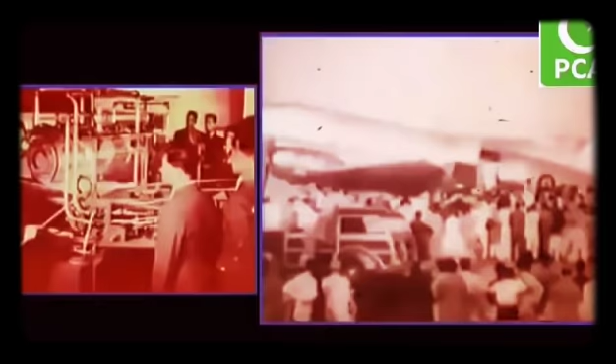Aircraft Manufacturing Factory was established in 1975 to undertake manufacturing of a primary flying trainer aircraft under license from Saab Scania of Sweden. The aircraft was named Mashak, meaning proficient, and was produced from kits provided by Saab. After successfully producing 92 Mashak aircraft, AMF acquired the status of Original Equipment Manufacturer, or OEM, in 1981.

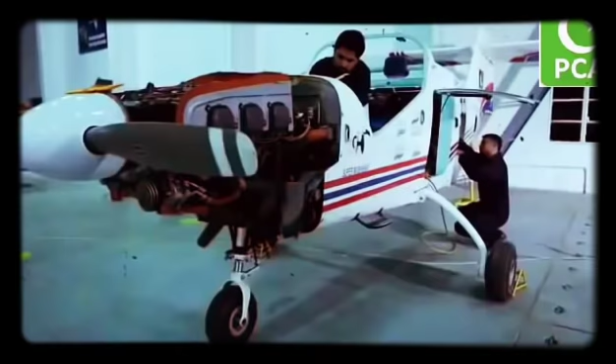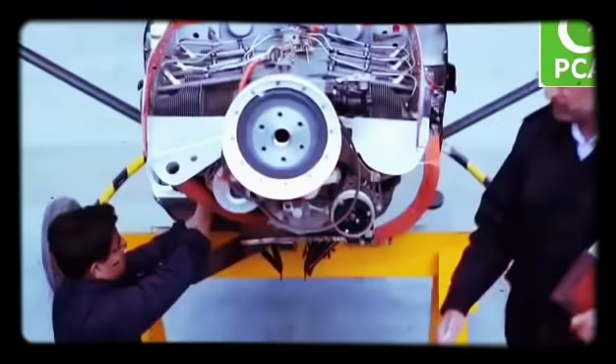Within a short span of just 30 years, AMF has produced more than 300 Mashak aircraft, which are successfully flying not only in Pakistan but also in foreign countries such as Saudi Arabia, Oman, and South Africa. The Mashak not only meets the requisites of international aviation standards but also conforms to Pakistan and South African civil aviation standards, and that is why it is the frontline aviation product of Pakistan.

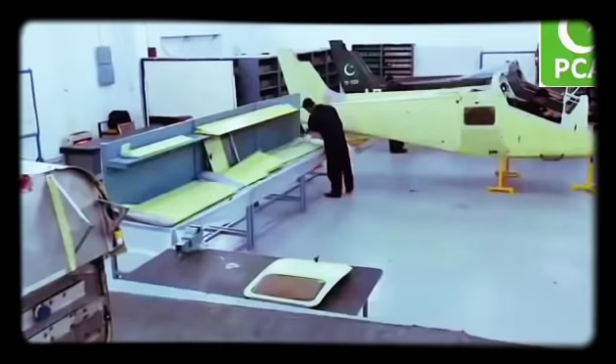During the course of manufacturing, AMF, in order to improve the design and performance, produced an upgraded version of the aircraft in shape of Super Mashak.

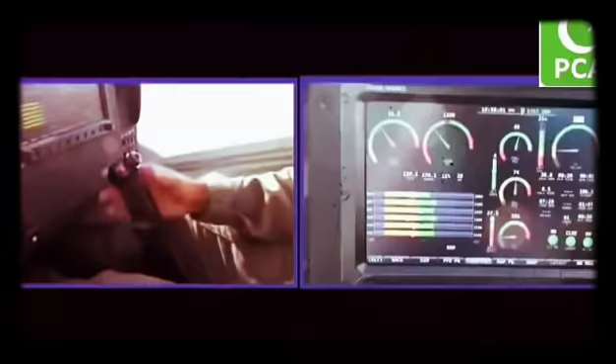Equipped with Lycoming 260 horsepower engine, advanced avionics package, Garmin and Dynon glass cockpit, and side-by-side seating for instructor and student pilot, Super Mashak forms an ideal platform for a variety of roles. Short takeoff and landing distance, higher G-load bracket, excellent stall and spin recovery, and above all, excellent after-sales spare and structural spare support are some of the key features rendering Super Mashak aircraft far superior to its contemporary primary flying trainer aircraft of the same class.

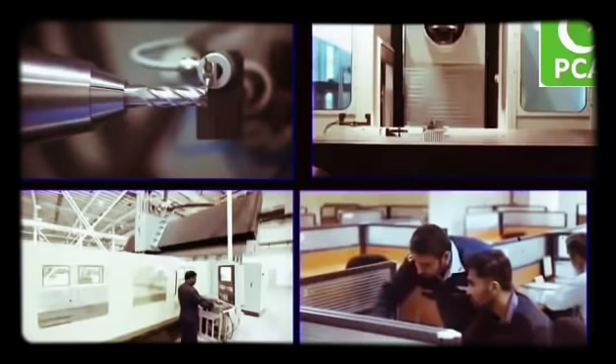The aviation industry in Pakistan has experienced tremendous growth in the last 30 years. Over the years, AMF's stature as an aircraft manufacturer grew manifold, with successive capability achievements to manufacture the jet aircraft trainer K-8 in the late 80s, the unmanned aerial vehicle Falco in 2008, and the modern jet fighter aircraft named JF-17 Thunder.

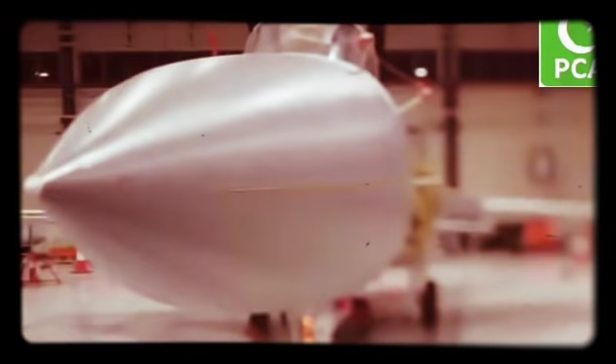Today, Aircraft Manufacturing Factory has the capability of manufacturing structural parts and aerostructure assemblies such as the horizontal stabilizer, elevator, vertical stabilizer, rudder, and front fuselage of K-8 aircraft.

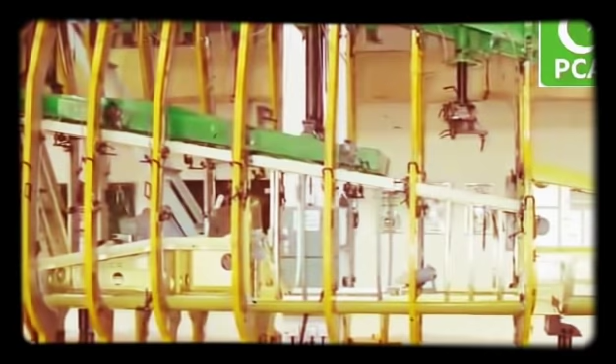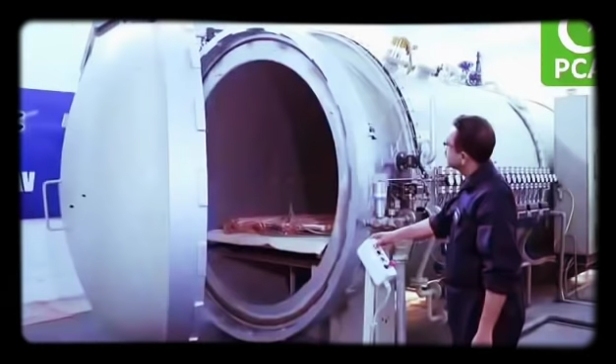Keeping abreast of evolving trends in aviation, AMF decided to venture into manufacturing unmanned aerial vehicles through the latest carbon composite material processes. Pakistan Air Force, after a comprehensive operational and technical evaluation process, decided on establishment of a Falco UAV manufacturing facility at AMF.

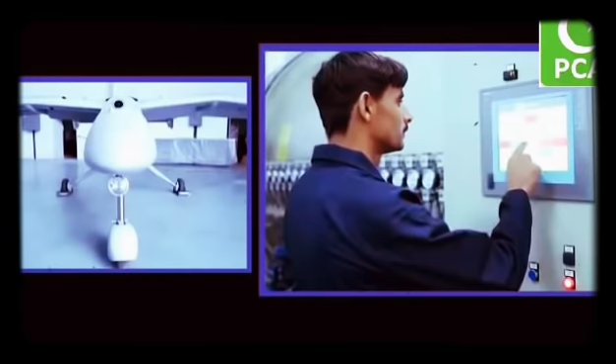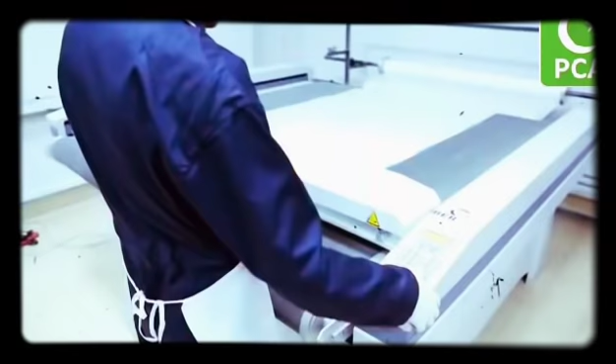During the first phase, 8 Falco UAVs were received in the form of semi-assembled kits. The final assembly and system integration of these UAVs was successfully accomplished at AMF PSC Kamra under the supervision of OEM in the 2007-8 timeframe. During the same time period, state-of-the-art equipment was also purchased to start co-production activities.

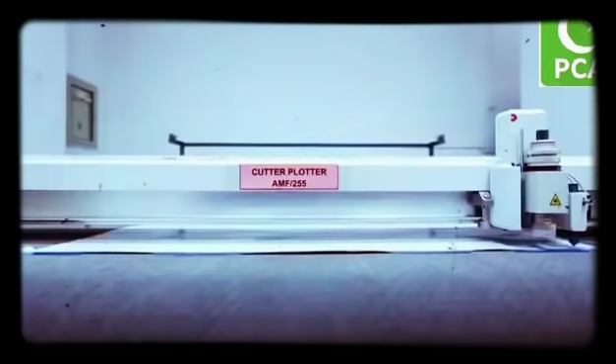After commissioning of the equipment and training on parts manufacturing, the newly established manufacturing facility was qualified by OEM to manufacture Falco UAVs on European quality standards.

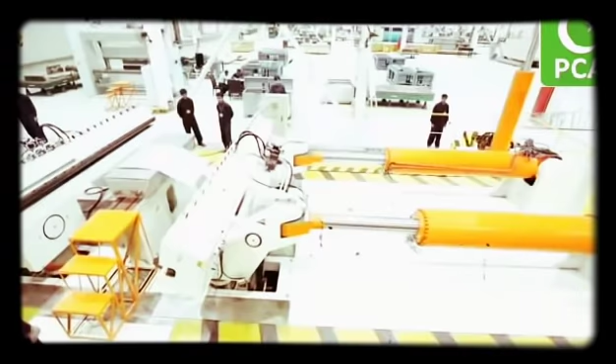An aviation industry is considered at its pinnacle when it has the capability of manufacturing a modern fighter aircraft. Today, AMF has complete infrastructure, core capabilities, and state-of-the-art technologies for manufacturing of JF-17 aircraft.

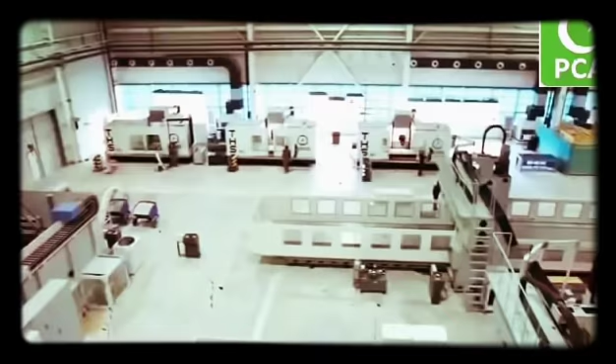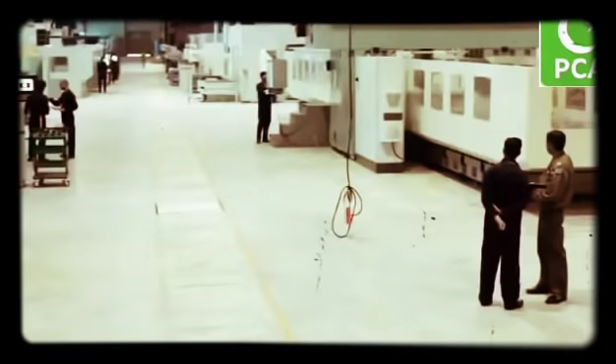The Machining Center for production of aircraft parts is equipped with state-of-the-art conventional and CNC machines. Parts with relatively lesser accuracies are manufactured on conventional machines, whereas complex parts involving higher accuracies and profiles described by higher order polynomials are manufactured utilizing CNC machines, integrated with computer-aided design and computer-aided manufacturing systems.

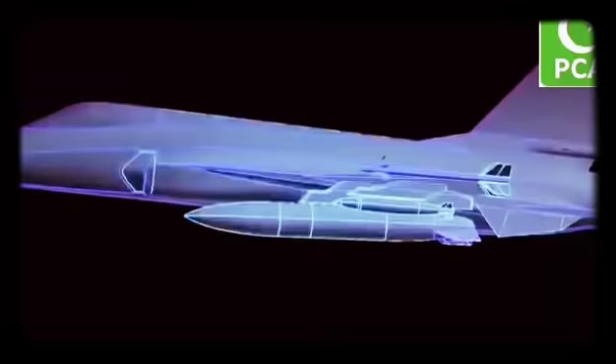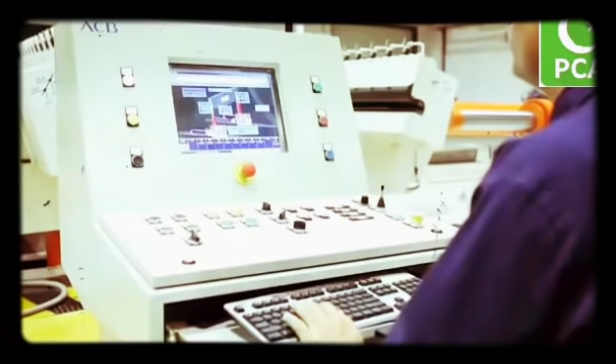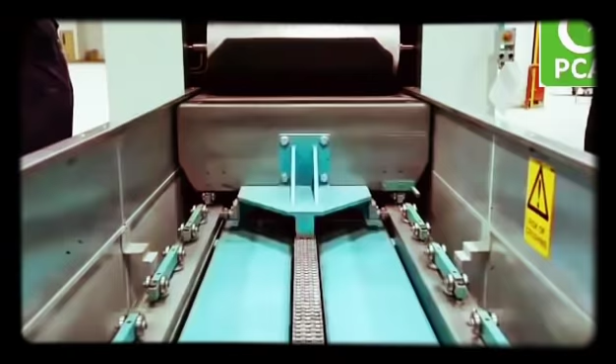The Sheet Metal Workshop for JF-17 parts houses an array of conventional and CNC machining facilities. Machines such as guillotine and nibbling shear, conventional and CNC stack routers, etc. are utilized for processes like shearing, routing, and sawing, whereas CNC shot peen forming, hydraulic quintus, fluid cell press, CNC stretch forming, and CNC punching are used for manufacturing parts involving sheet forming processes.

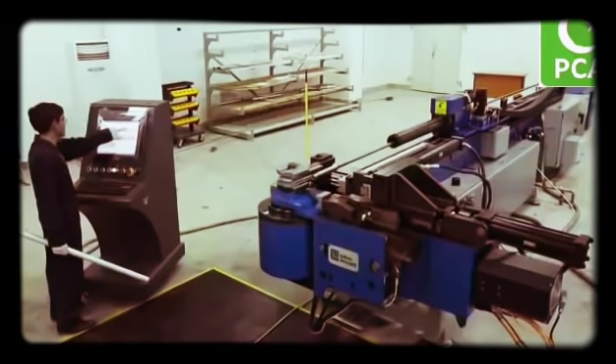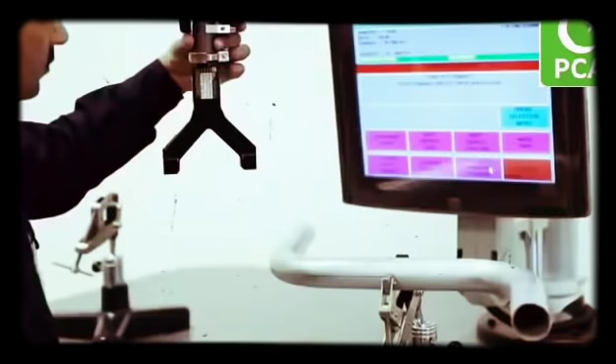Pipe manufacturing, emerging recently as a separate technology of manufacturing, caters for the requirements of aircraft hydraulic, pneumatic, and oxygen systems. It involves pipe bending, end fitting, testing, marking, and covering. The most typical equipment being used in pipe manufacturing is the CNC pipe bending machine.

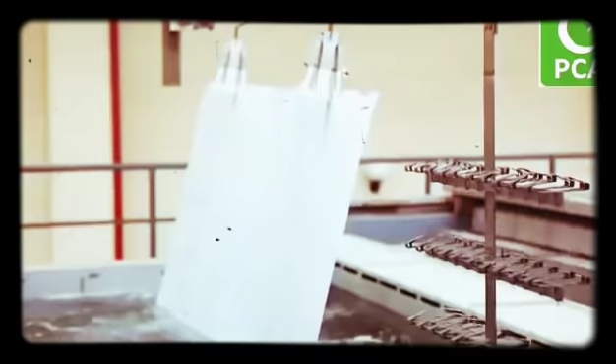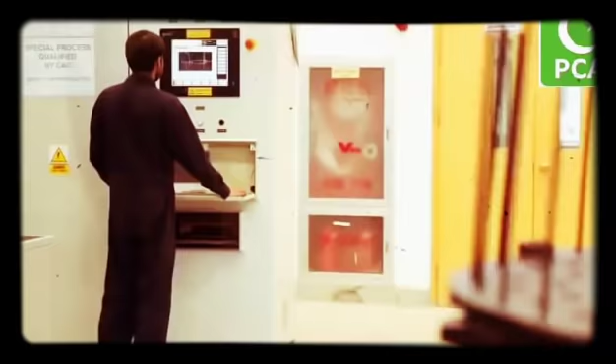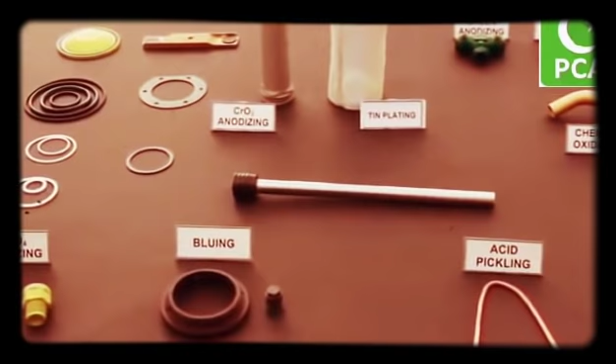Special processes form an integral element of any modern manufacturing facility, as almost all sheet metal and machine parts undergo heat treatment, surface treatment, welding, and various other types of special processes during manufacturing. Vacuum oil quenching furnaces, air circulating and conventional furnaces, etc. are employed for heat treatment, whereas chemical treatment facilities include anodizing, chromating, bluing, phosphating, pickling, passivation, electroplating, primer painting, and chemical milling.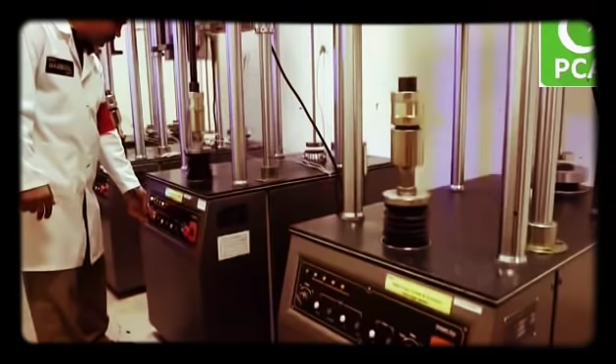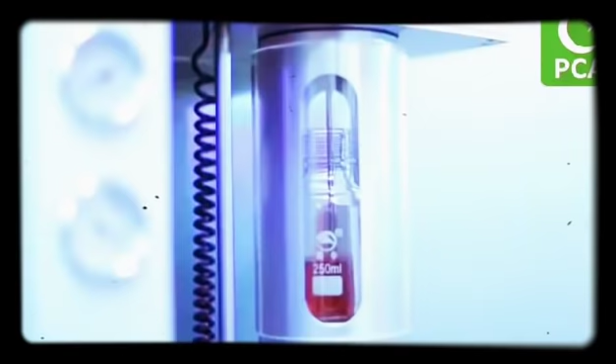Every manufactured part has to undergo a series of testing and inspection procedures from raw material till final stage at the Material Testing Center. The Material Testing Center has the capability to conduct all kinds of physical, chemical, and non-destructive testing of materials, including testing capabilities of all heat and surface treatment equipment for periodic qualification.

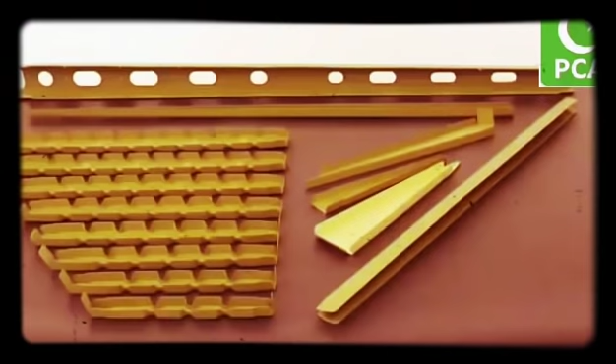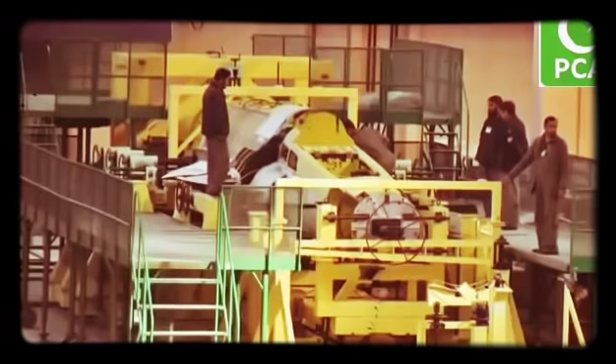The first phase of aircraft assembling starts at the aerostructural build-up facility. Hundreds of sheet metal and machine parts, pipes, and components are skillfully put together with the help of thousands of rivets to build aircraft sub-assemblies such as fuselage, wings, horizontal and vertical stabilizers, and ailerons.

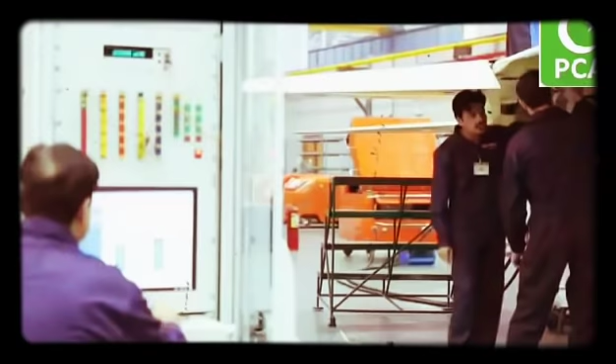The aircraft starts to take shape at the final assembly setup, where sub-assemblies, all system parts, engine, piping, and cabling are installed and integrated before sending the assembled aircraft to the flight test station for stringent power-on and functional checks of each and every system of the aircraft.

This is followed by a series of aircraft ground runs and quality shakedowns before finally handing it over to the test pilot for yet another series of functional check flights to ascertain the airworthiness.

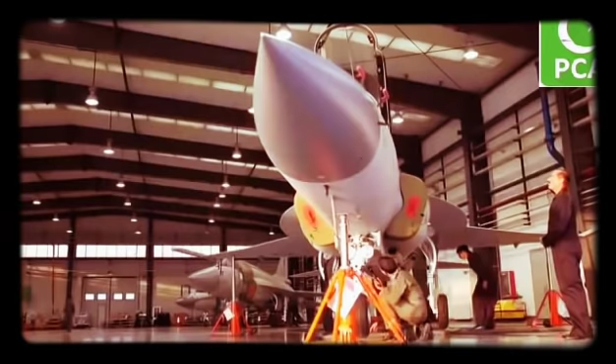The manufacturing of JF-17 Thunder fighter at Aircraft Manufacturing Factory has brought Pakistan among a select group of countries of the aviation world. Attainment of this capability in less than a quarter of a century itself speaks of the highest standards of dedication that AMF engineers and technicians showed since the word go.

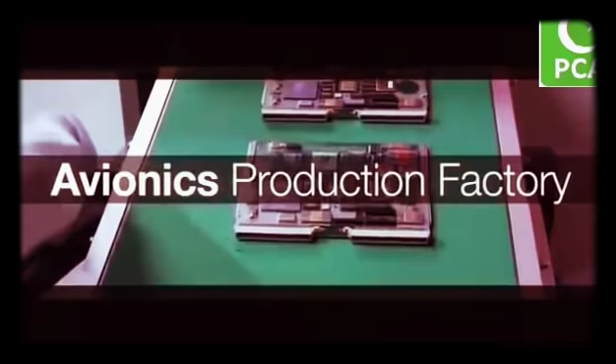Avionics setup of Pakistan Aeronautical Complex, known as Avionics Production Factory, was initially established as the Radar Maintenance Center in 1983 for overhaul and rebuild of ground-based radar systems. In 1989, it was transformed into a full-fledged avionics factory with ability to handle avionics as well.

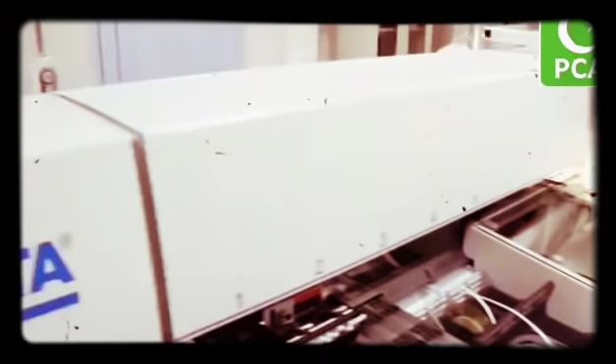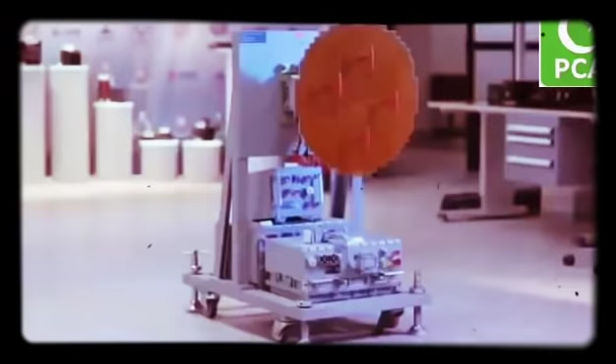Today, this factory, with its state-of-the-art facilities, can undertake production of different types of avionics as well as commercial electronics equipment while ensuring high-quality standards as per the requirement of Aerospace Standard 9100C. The factory has produced numerous avionics systems like Grifo-7 and KLJ-7 airborne radars, radar warning receivers, identification of friend or foe systems.

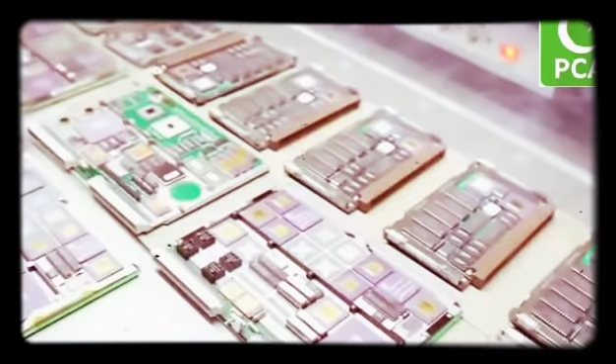Digital, audio, video and crash recorders, various mission computers and navigation systems. Most of these systems have been co-produced in collaboration with Chinese and Western manufacturers. The factory has also produced various commercial products such as PAC pad called Takhti 7, PAC notebook and e-book reader.

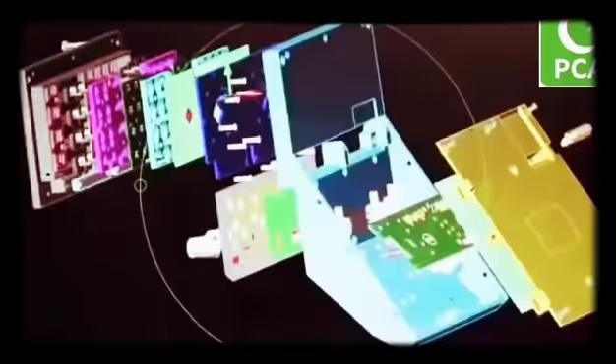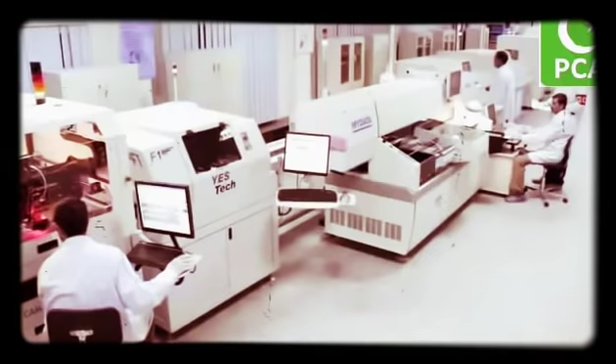The avionics production facility at APF can be divided into 6 major segments: design and development, avionics integration, production line, testing line, specific system department, and environmental stress screening facilities.

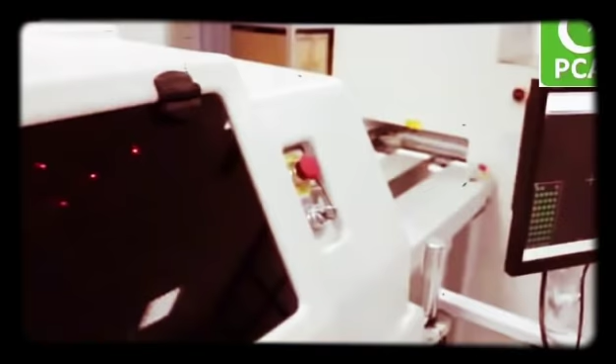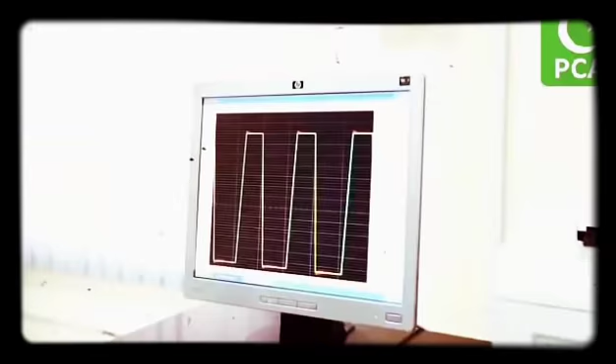APF can undertake design and development of avionics systems based on user requirements and provide complete solutions from concept to life cycle maintenance of the products. The prototype avionics systems are designed using computer-aided design and simulation tools. The prototype systems also undergo electromagnetic interference and electromagnetic compatibility and environmental qualification.

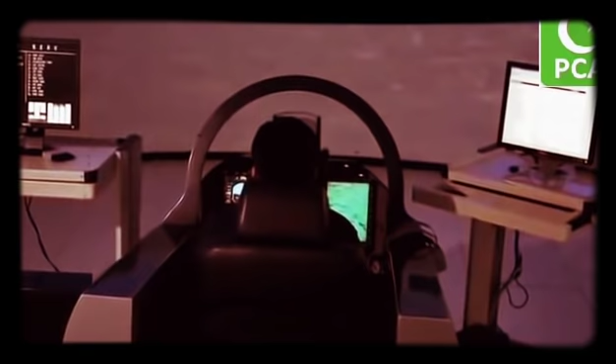Systems developed at APF have qualified and are flying on fighter aircraft. The developed system prototypes are functionally tested and integrated in the Dynamic Simulation and Integration Laboratory known as DSI. The facility can also undertake integration of off-the-shelf systems with an avionics suite.

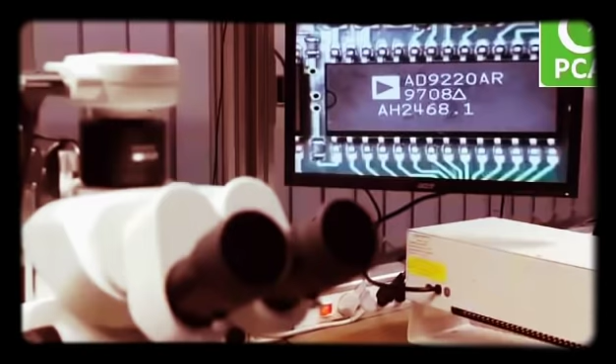Being a certified avionics integrator with years of experience, APF has developed core integration technology for meeting requirements of new fighter aircraft and upgrades and modifications as well as retrofits in older aircraft.

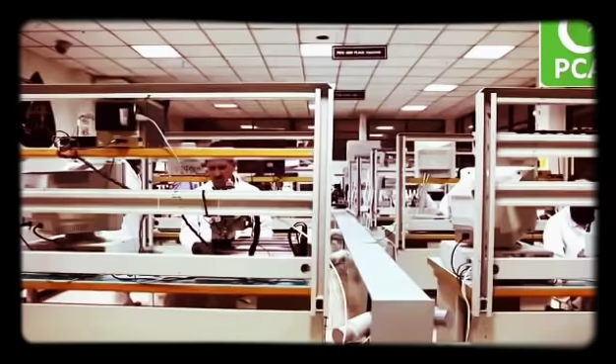The systems are validated through hardware in the loop ground testing in simulated environment and are subjected to flight trials before final qualification. After successful qualification, serial production is undertaken utilizing semi-automated and automated machines.

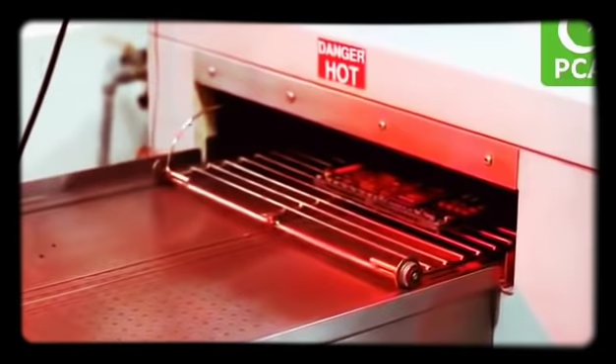APF is a qualified production vendor for various companies, and its generic production line employs stuffing of surface-mounted and through-hole electronic components on bare printed circuit boards.

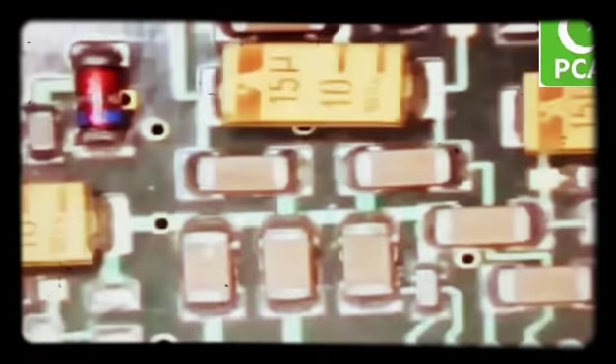PCB stuffing is a multi-stage process involving PCB inspection, cleaning, and drying before these are ready for components installation. The processed bare boards are then passed through automated assembly line which installs the components.

Few components like connectors, etc. are however installed manually. The assembly line is configured to adapt to production of any types of PCBs.

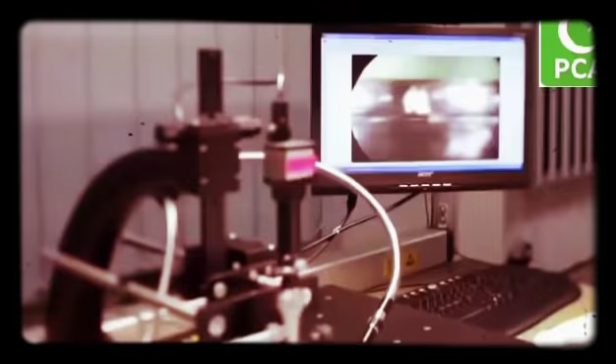The completed PCBs are inspected using optical and X-ray inspection systems for faults before being passed for testing. The standard of workmanship during complete production process conforms to requirements of IPC 600 and 610D standard.

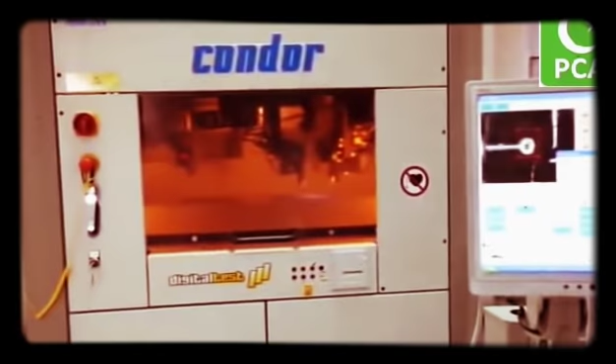Stuffed PCBs are passed to generic testing line for in-circuit and functional testing. These PCBs are powered on and tested to ensure serviceability of individual components and complete functioning of PCBs.

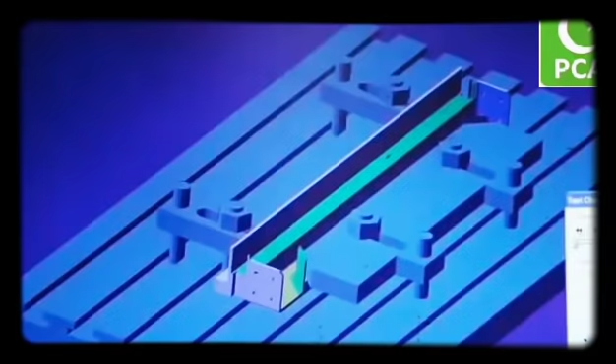The testers are adapted for testing any electronic assembly. The testing facility is generic and comprises of sophisticated test stations. APF has the expertise to develop complete testing solutions, including development of software programs and mechanical adaptations for testing.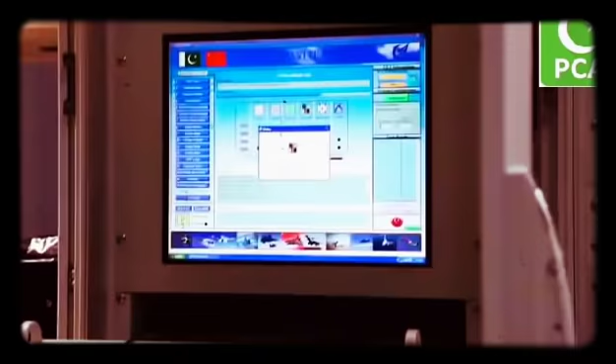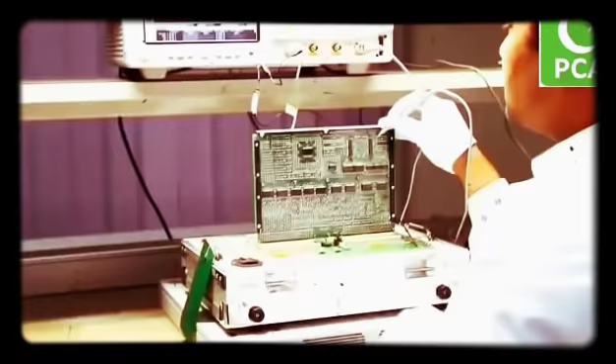When PCBs have been stuffed with components and tested, these undergo conformal coating before being fed to specific system department. Here, these shop repairable units, along with other components, electrical and mechanical wiring, and harness assemblies are put together as a line replaceable unit for final testing of system.

Since the processes require unique procedures for each system, there are separate assembly and testing areas for every system.

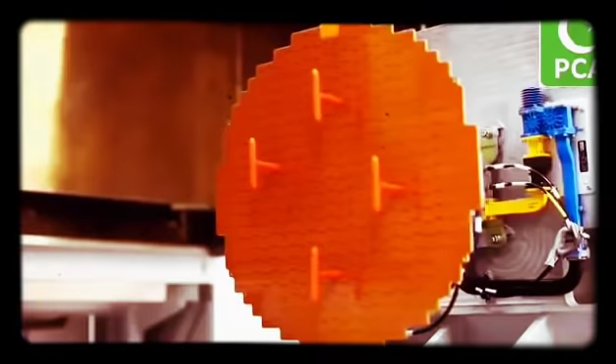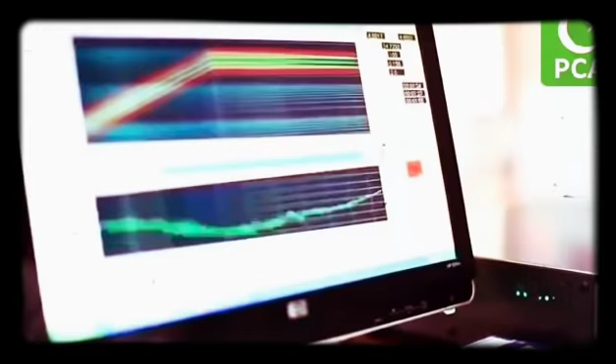Once a system is ready, it is passed over for environmental stress screening, where these systems are exposed to practical military environment with the help of thermal climatic chambers and shakers. The aim of this strenuous testing is to ensure that the equipment conforms to actual aircraft environment as per requirement of Military Standard 810D. The systems that pass through this process are guaranteed to perform reliably when put into operation.

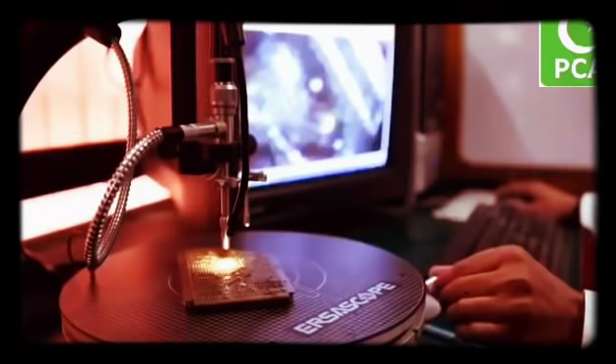Avionics Production Factory also provides life cycle maintenance for these airborne avionics systems. Factory employs skilled manpower with years of experience in repairs. The facilities are equipped with latest test and measurement equipment, and repairs are undertaken as per international quality standards to ensure original equipment manufacturer specifications.

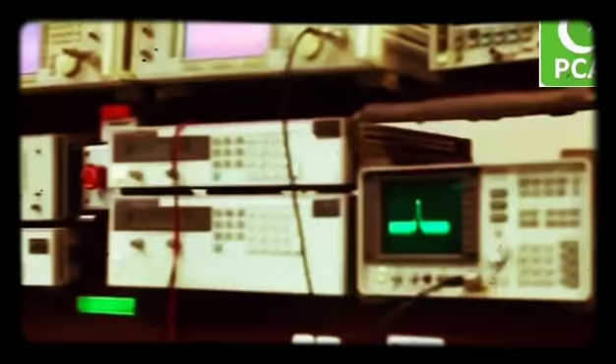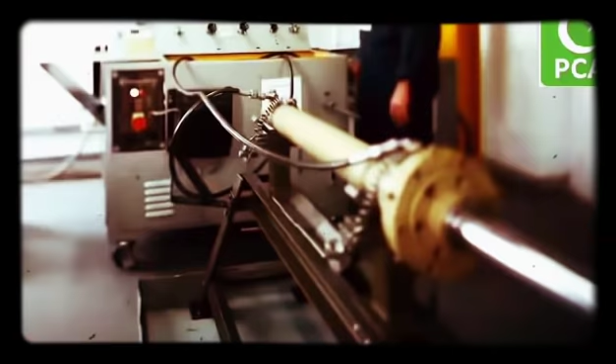APF also carries out overhauling and refurbishment of low-level and high-level ground-based radars, especially Mobile Pulse Doppler Radar known as MPDR. The facilities available with APF are electronics modules repairs and testing, cable and harness repair and manufacturing, which includes RF, signaling and power cables, antenna structural repair and testing, troubleshooting and repair of hydraulic systems, gear testing facility, and radar vehicle overhauling.

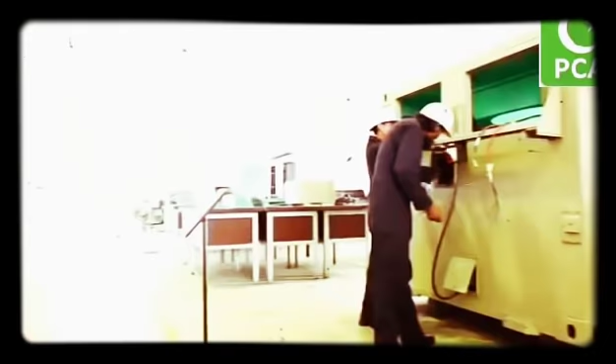Overhauling of radars give a new life to the old radars and are considered fit for operations for another life of 8 to 10 years. The factory has so far overhauled more than 90 MPDRs and TPS series of radars.

ARF has come a long way to acquire the knowledge and skill in the field of quality production and repair of avionics equipment and overhaul of ground-based radars, and looks forward to enhance this capability further to achieve the excellence.